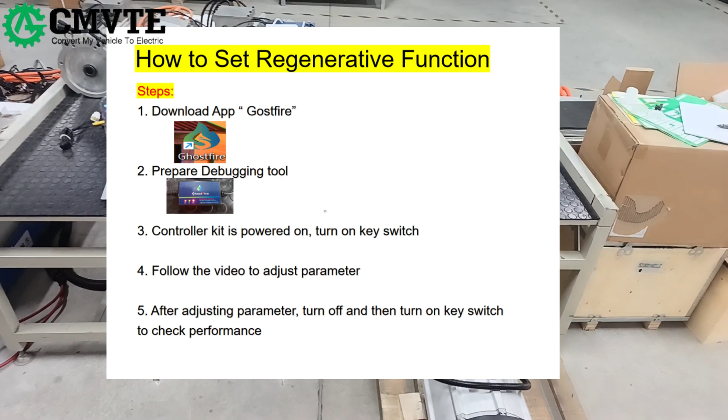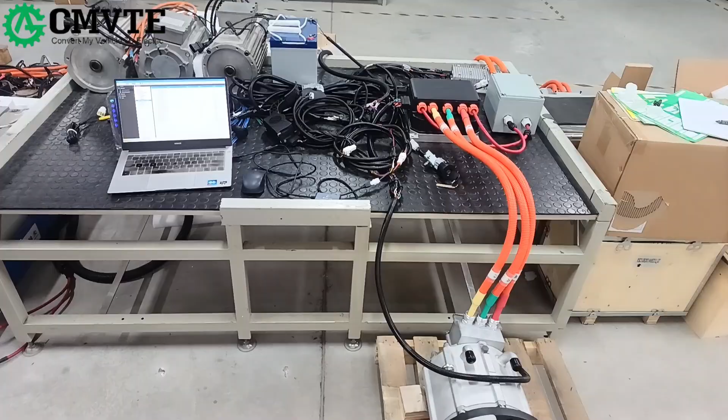This video is to show you how to set regenerative braking. Now you can see this kit is connected and the controller is powered on.

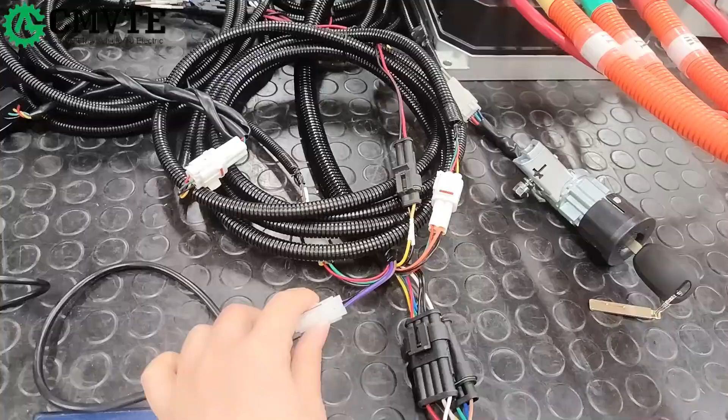We use this debugging tool. This one connects with the wire harness and this one connects with the computer. Then you download this software, Ghostfire.

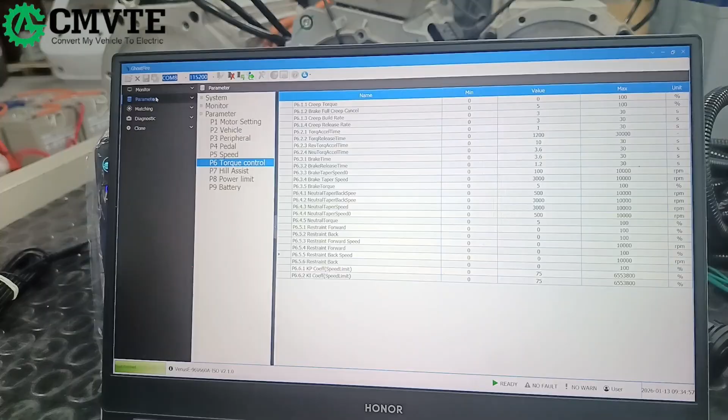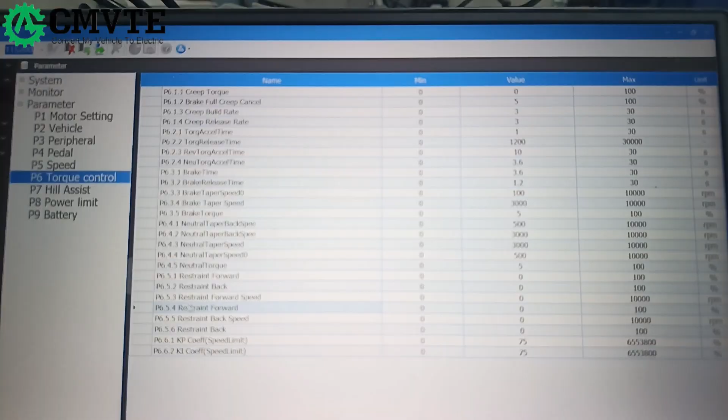Now we open it. The first step is to choose the parameter, online parameter, and here you see the P6 torque control. On this way we choose P6.5.4 restraint forward. You can see the max parameter here is 100%.

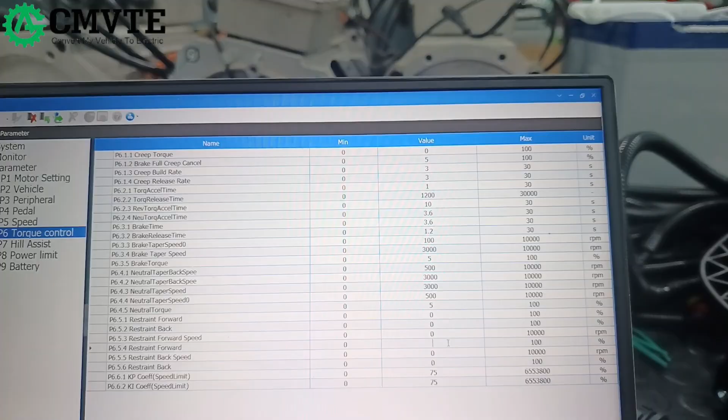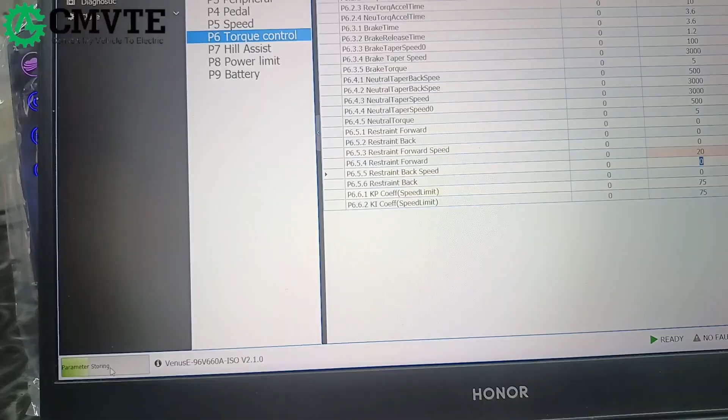We can change from 0 to 20, then click enter, then do the download here. Here you can see it's processing. You see the parameter storing, and the parameter saved. Then we click refresh.

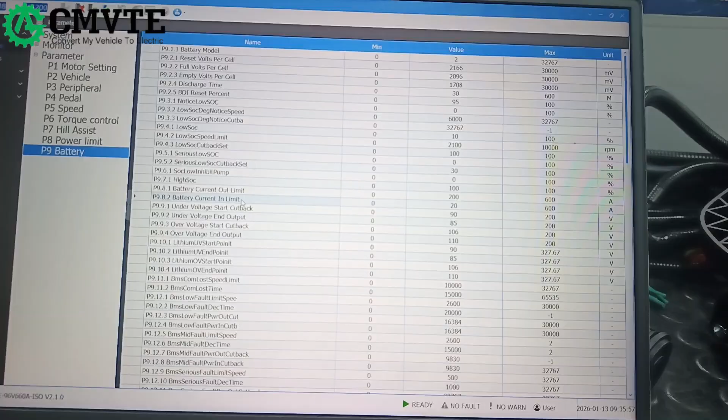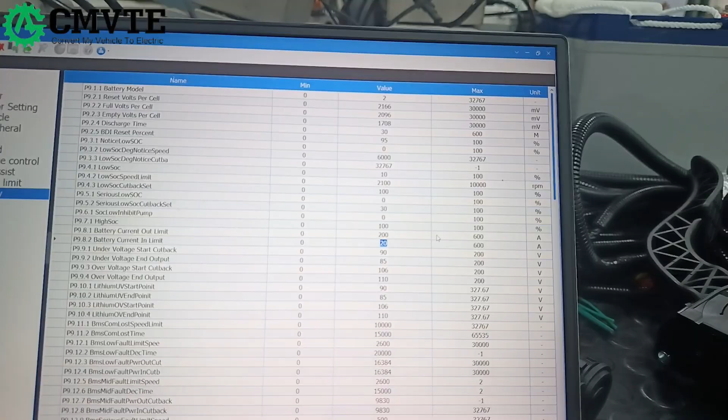So this is the first step. Then the second step is to click P9 battery and choose the parameter P9.8.2 battery current in limit. You can see the max current is 600 ampere and we can change the value from 200 to 50. Then click enter and do the download again.

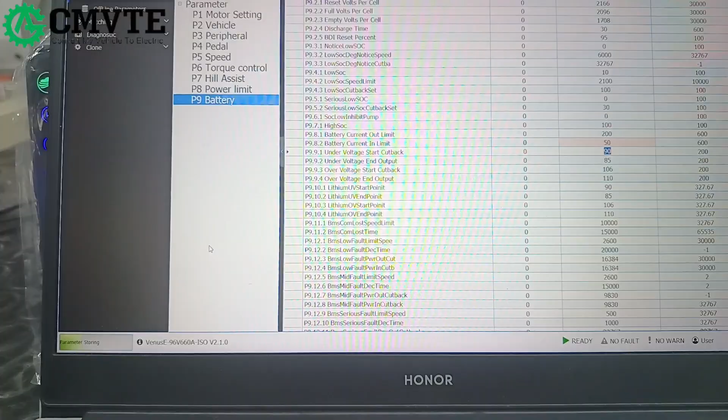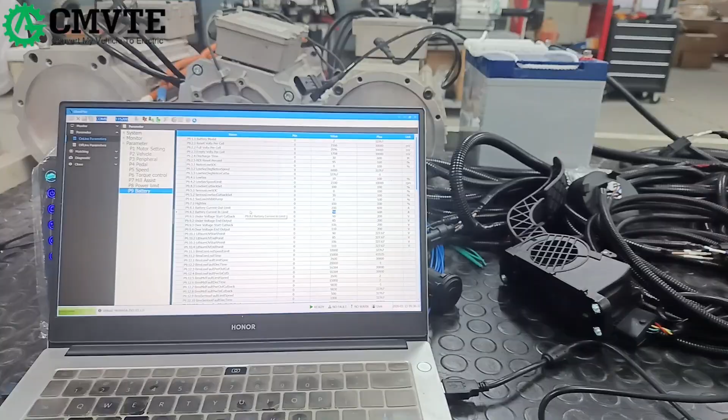You can see here the parameter storing, and saved. Then we click the refresh. So it's okay now. You can power off the key switch and restart.